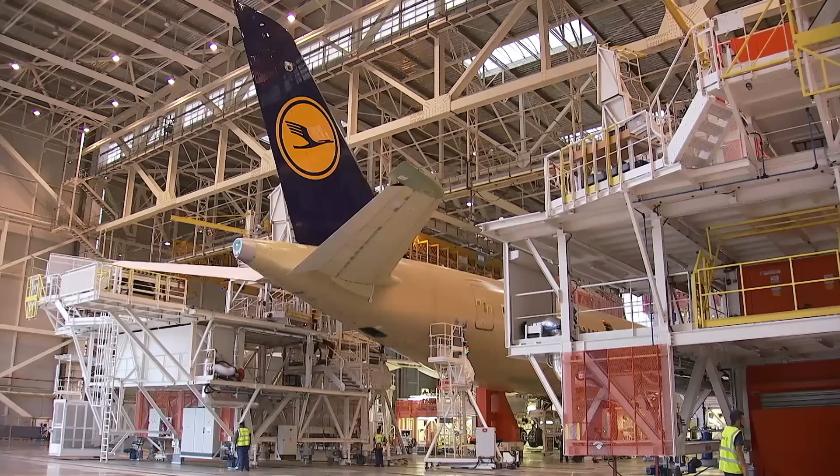Air travel has become an integral part of our everyday lives, connecting the people on our planet. For some years now, competition among airlines has been increasing, competition in which modern super airliners play an important role. The Airbus A350 is one such super airliner. Germany's largest airline has already ordered a significant number of these new long-haul aircraft. But can the airliner meet the high expectations?

The A350's first official flight goes from Munich to Hong Kong. The high-tech jet now has to prove itself under real conditions, a direct flight and a stress test with a duration of 12 hours. It's the most modern commercial airliner on the market.

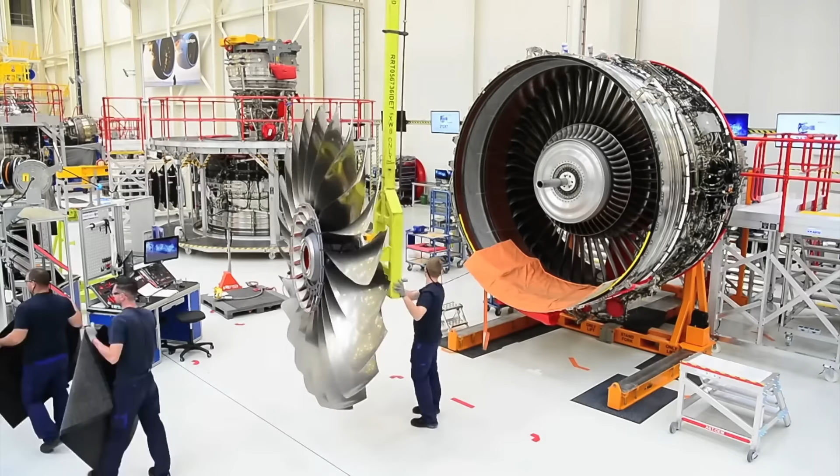The engines from Rolls-Royce have been completely redeveloped and enable the aircraft to carry out extreme flight maneuvers. We'll be pushing the aircraft to its limits here. On a test flight, the new A350 is rolled to a bank angle of 67 degrees.

There are also improvements for the passengers. More space and larger HD monitors are just some of the features. But the current super airliner from Boeing also has a lot to offer: new, larger windows and a completely new lighting concept for passengers on the 787 Dreamliner.

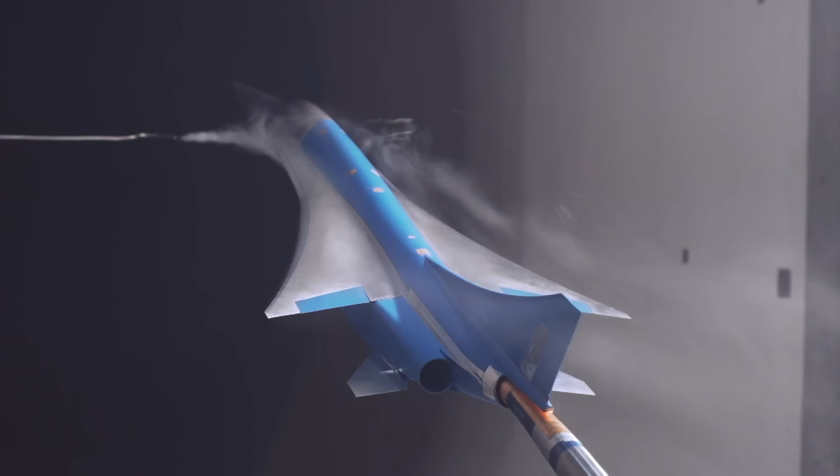London to New York in only 3 hours, possible only by flying at twice the speed of sound. But that's only the beginning. In the near future, even flying drones will help alleviate the traffic chaos in our cities. And developers are looking even further into the future with their concept plane, an example of what the future could look like. This future, we will build it together.

The super airliners for the new millennium are ready to hit the skies.

The Airbus factory in Hamburg. The city on the River Elbe is the third largest construction location for civil aircraft in the world. Around 12,000 people work here in development, design, and final assembly. Besides other aircraft, 2 super airliners are being produced on the 19 square kilometer site: the biggest passenger aircraft in the world, the A380, and the new long-haul jet, the A350. There was even a new assembly hall built especially for their manufacture.

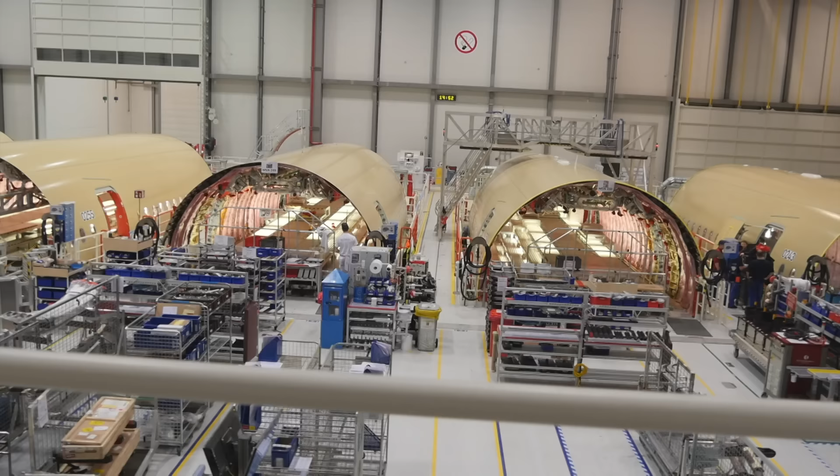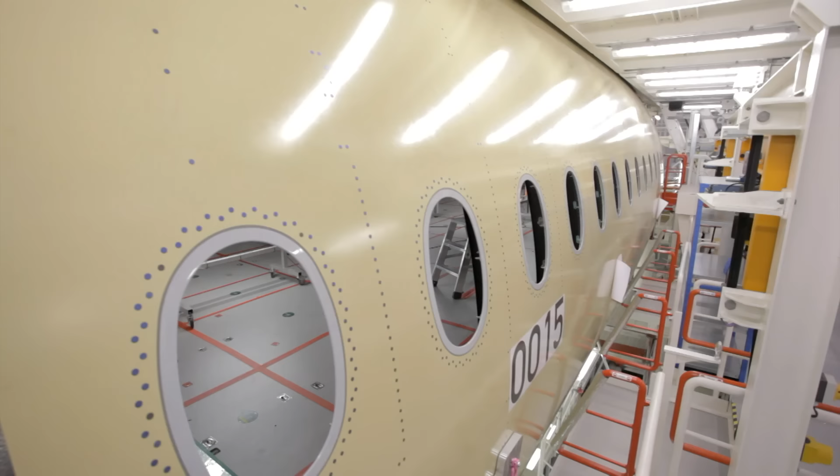Here, the mechanical and electrical systems are installed for 2 fuselage sections: the forward section, which starts behind the cockpit, and the rear section behind the wings. At first sight, the individual fuselage sections all look the same, distinguished only by their different production numbers. Everything runs according to a fixed assembly schedule, which begins with delivery of the front fuselage section. The staff here refer to this as the barrel, in which they gradually install the various systems. That is now much faster than in the old assembly hall thanks to the new construction method. For the fuselage and wing structures, more carbon fiber composites are used than in any other commercial airliner.

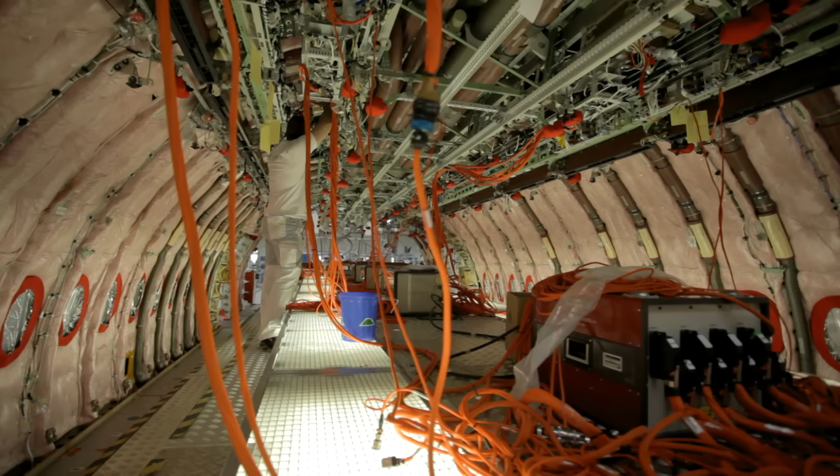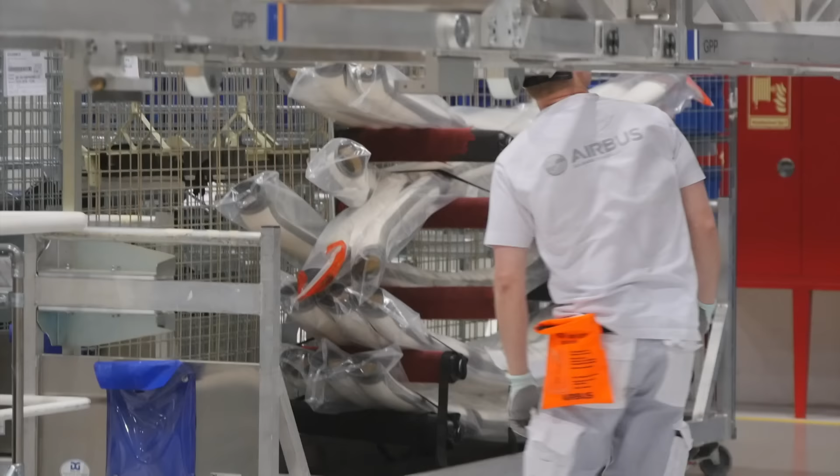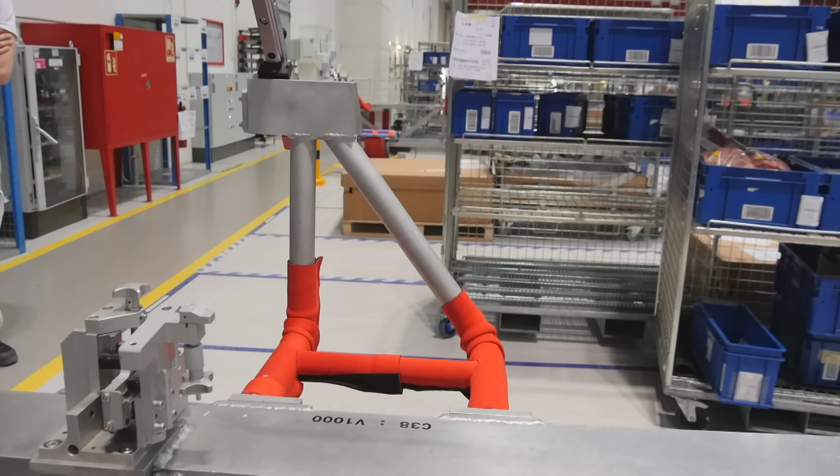After only 12 days, one fuselage section leaves the Hamburg works and is flown to Toulouse by the Beluga transporter. This production speed, however, is only possible by using the assembly method known as module integration. That's a very special assembly method here in aircraft construction. The A350 is currently the only program carrying out installation this way in the entire Airbus group.

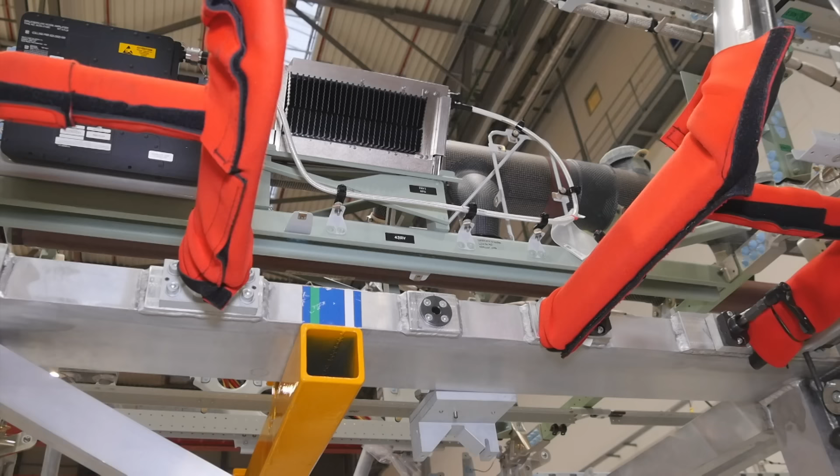In these frames, cables are laid, air conditioning ducts mounted, and small control devices installed. The benefit is that there's no more overhead work, as the modules are only installed in the cabin ceiling at a later stage, a great relief for the technicians. However, everything is still installed by hand. The cables are bundled into so-called raceways and then ducted before these raceways are also installed into the modules. Each individual line is then checked once again by technicians before being installed in the barrel.

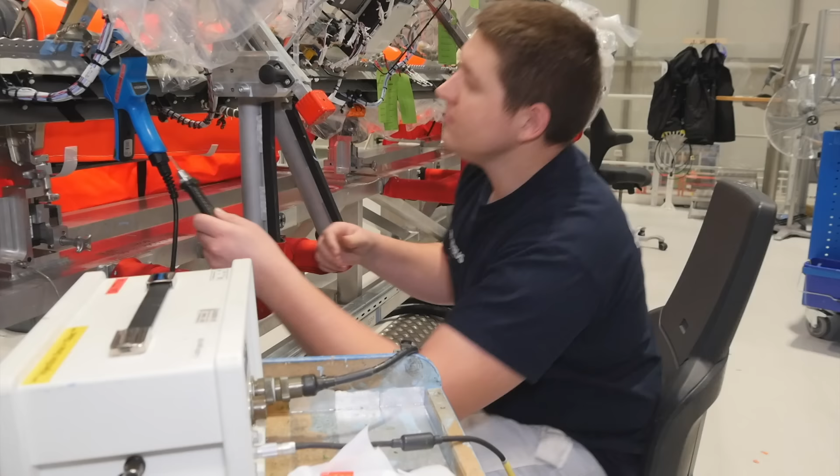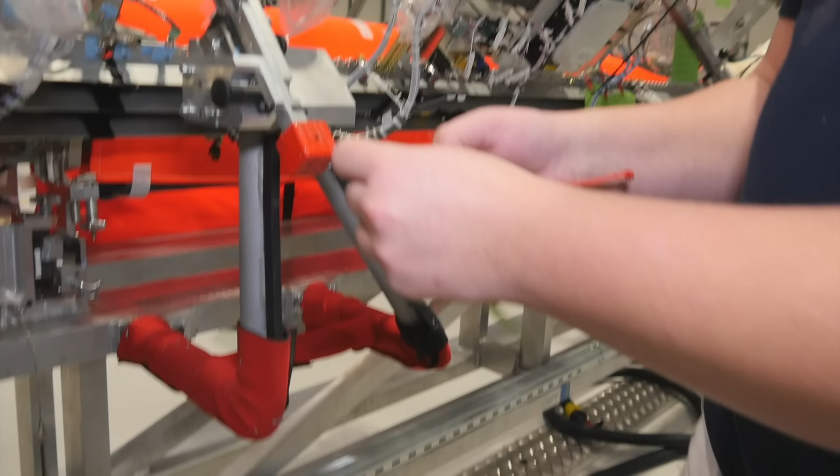If everything is okay, green labels are attached with the letters GTI printed on them. GTI stands for Ground Test Instruction, and there's a precise definition for the way we have to check our contact resistances and the rest of the electrical equipment. Electrical resistance is measured at various points with the help of a measuring device. This resistance measurement is extremely important for safety during flight operations. If the contact resistance or general resistance is too high, or the currents flowing over them get too high, as in a lightning strike, it would lead to a lot of heat developing here, and that's definitely not something we would want in an aircraft.

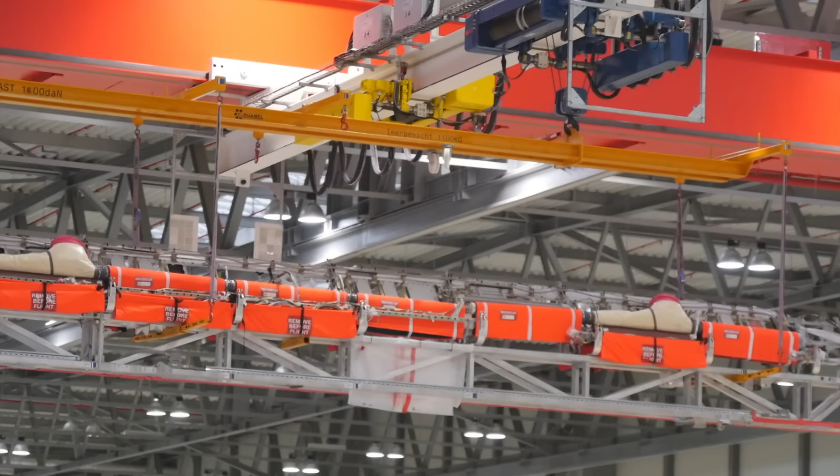Once the module has been assembled, it's carefully transported by crane to the A350 fuselage. The time saved by this new assembly method is enormous. The manufacturer now delivers more aircraft than ever before. A350 production alone now sees 10 aircraft completed every month. This is also due to the passenger cabin being assembled parallel to the fuselage, wings, and tailplane.

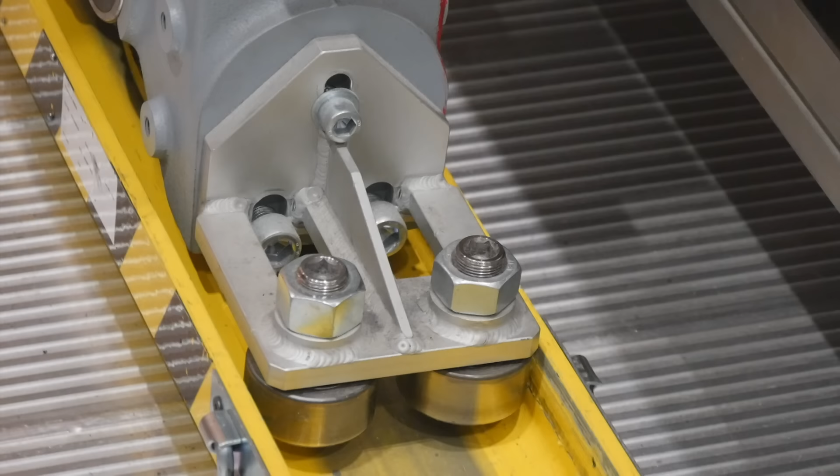Now the retaining bolts are removed and the module is slowly edged towards the fuselage. There are currently 3 versions of the aircraft available. Here, the middle version, the A350 XWB-900, is being built for Lufthansa.

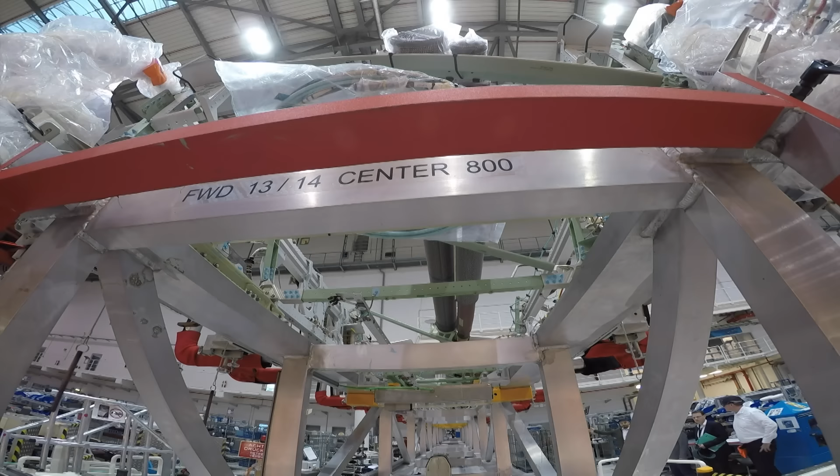The module is slid into the fuselage on a rail. Nothing must go wrong now. The slightest error could bring the entire production to a standstill. The technicians are all highly focused because the safety of future passengers depends on this.

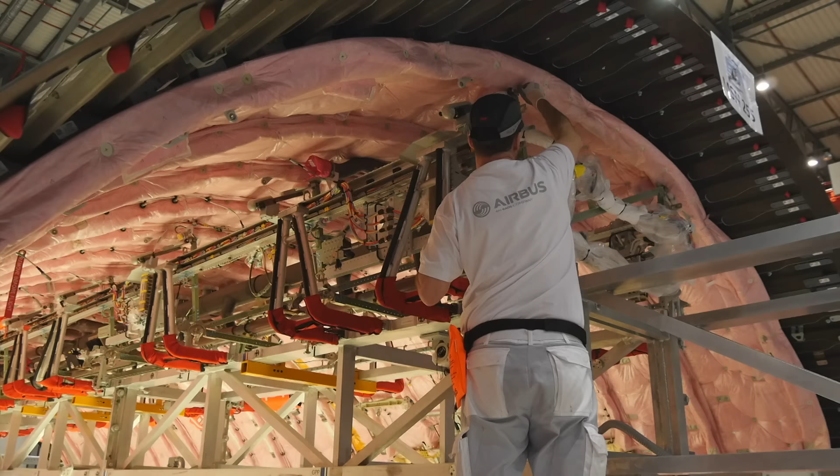Minor deviations in the height of the module are corrected using adjusting screws. Hundreds of cable harnesses are still hanging down from the module ceiling. They will soon all be laid individually by hand.

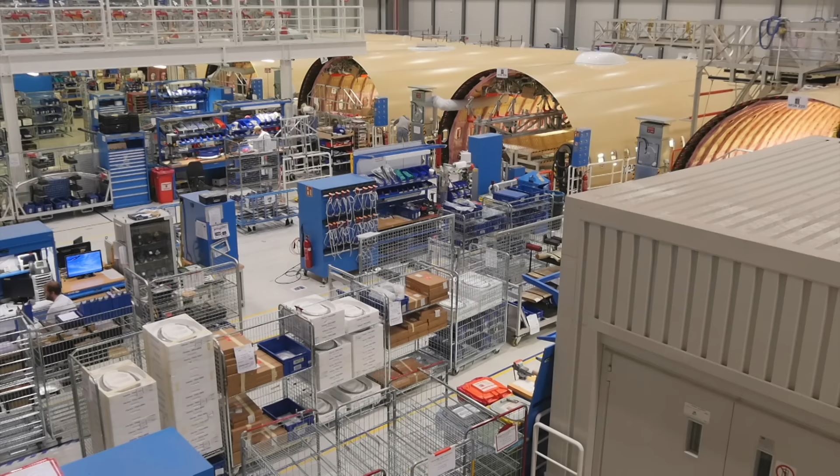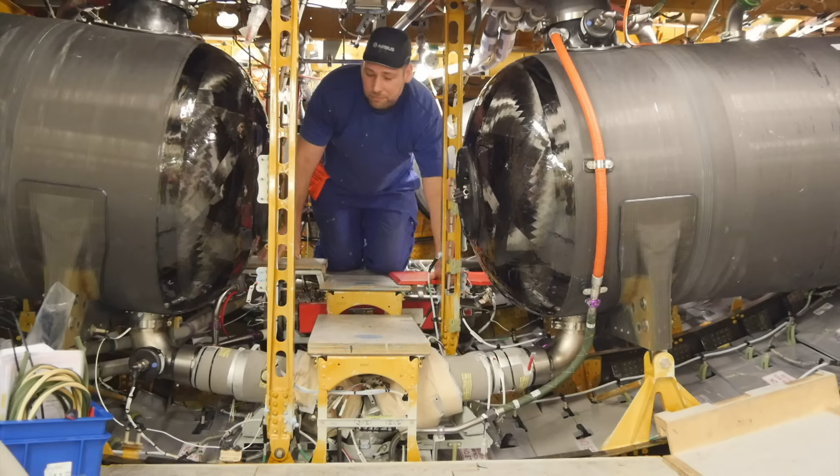While work goes on in the upper section of the cabin, in the lower section everything is finished. We're here in the plane's cargo section, where all kinds of systems are installed that passengers don't get to see. In the rear section, there are the fresh and wastewater tanks.

There are 2 freshwater tanks installed here, a larger and a smaller one. The larger tank holds about 800 liters and the smaller one around 600 liters. We allow about 40 liters per passenger.

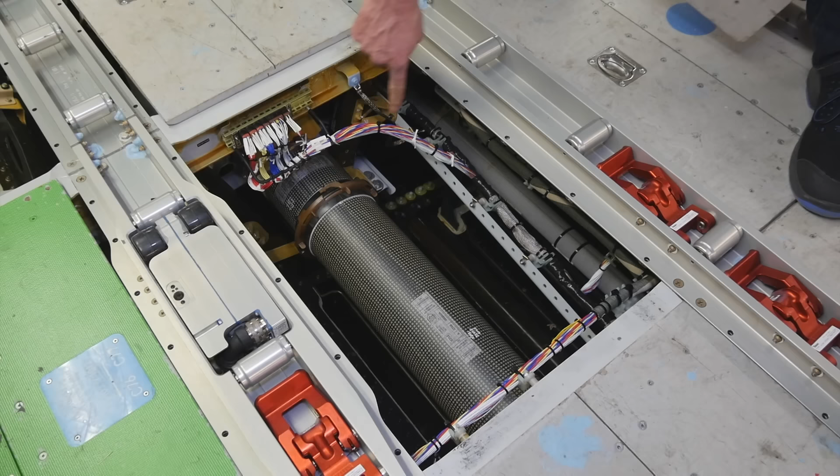Under this floor paneling is where the A350's oxygen supply is installed. The supply lines are well protected in the middle of the fuselage. Here too is all the cabling for the cargo system. This automatically guides the freight containers into the fuselage and ensures the load is correctly positioned.

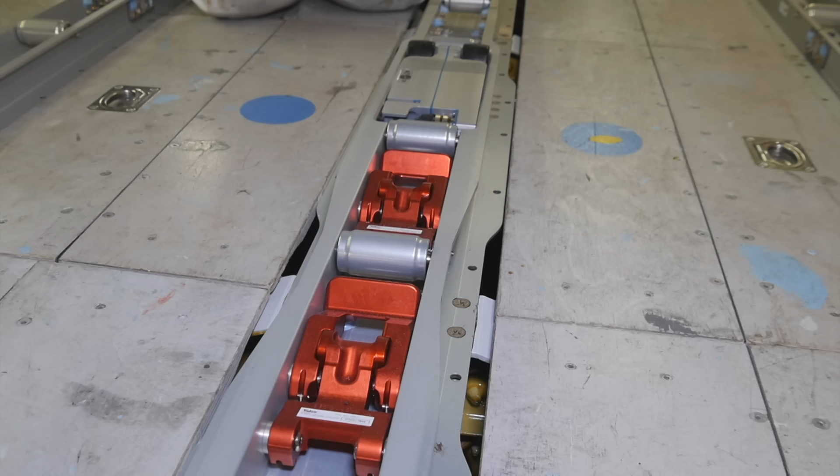Here we've installed the cargo loading system. These are the roller conveyors. They consist of different compartments where the luggage or freight can be loaded onto, and so it arrives at its destination safely without slipping.

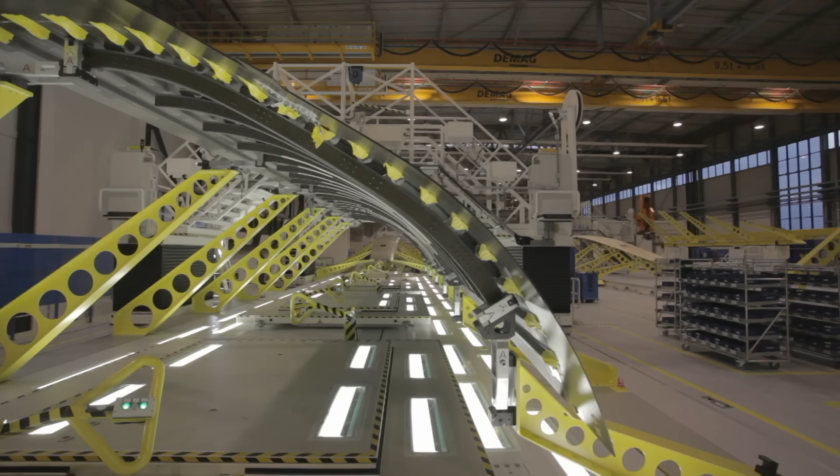After 15 years of development, the A350 will now succeed the Airbus A340 as the new super airliner. The way it's produced is also completely new. New materials demand new manufacturing methods. Special bolts are used to connect the fuselage sections.

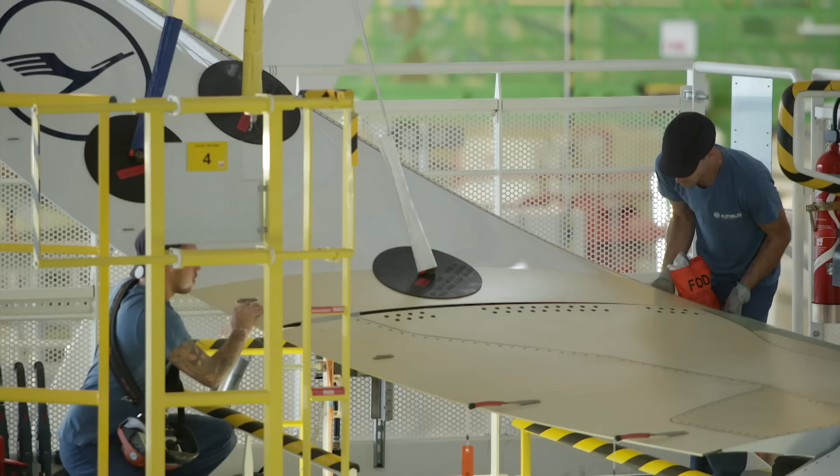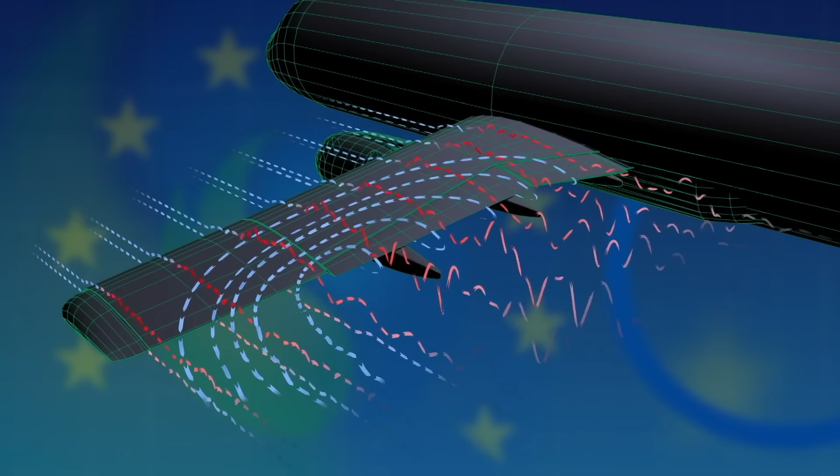The A350 also has reinforced high-speed wings. They are made of CFRP, a carbon fiber reinforced plastic, making them suitable for higher speeds. The extremely smooth wing surface the CFRP creates results in less air turbulence, which in turn means reduced air resistance and consequently more lift. This guarantees greater stability and at the same time 4.5 tons less weight.

To build these wings, a completely new process is used. Similar to the principle behind a standard 3D printer, the wings are built up layer by layer. Here, a small model of an aircraft wing is produced, but in the plant at Stade near Hamburg, the upper level of a full-sized wing is printed with the help of a giant roll of adhesive tape.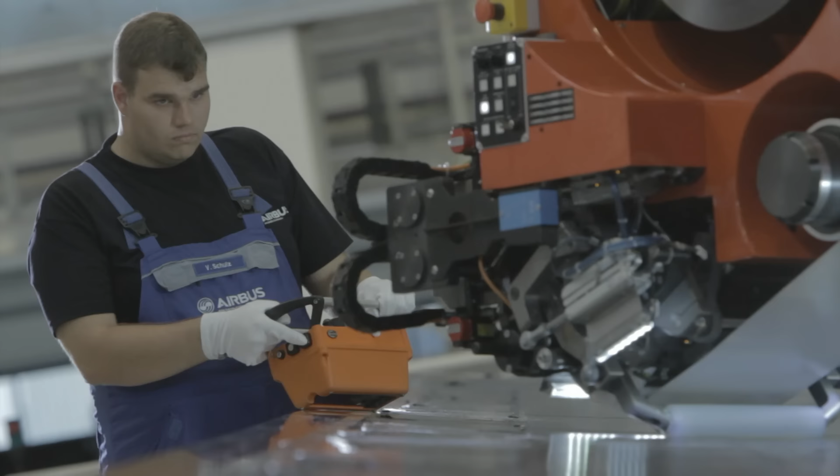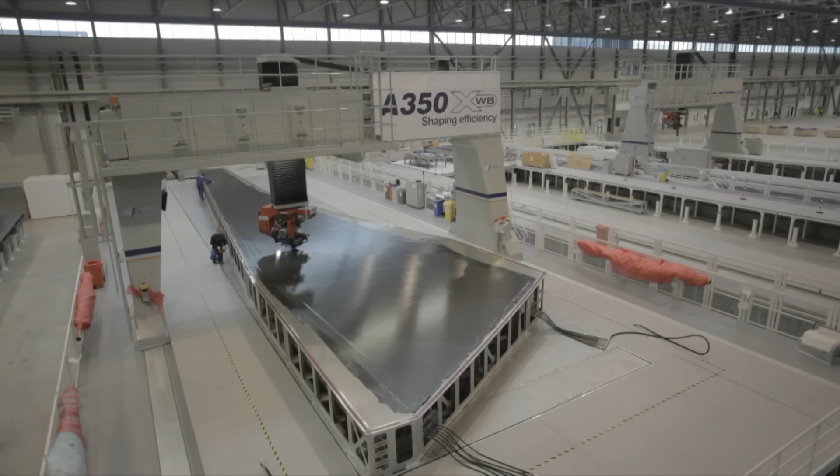On each of its long sides, there are 12 rotating spools which unroll black strips of CFRP. Large aircraft manufacturers are increasingly using this material to save weight, kerosene, and money. CFRP is stronger and easier to work with than aluminum or other metals. It's also much lighter.

In the development of the new super airliner, cooperation with the various airlines is extremely important. It's a continuous process. Based on our experience in daily scheduled operations and close contact with the manufacturers, Airbus, we help to develop new solutions for future aircraft, which can then later be found in our own fleet.

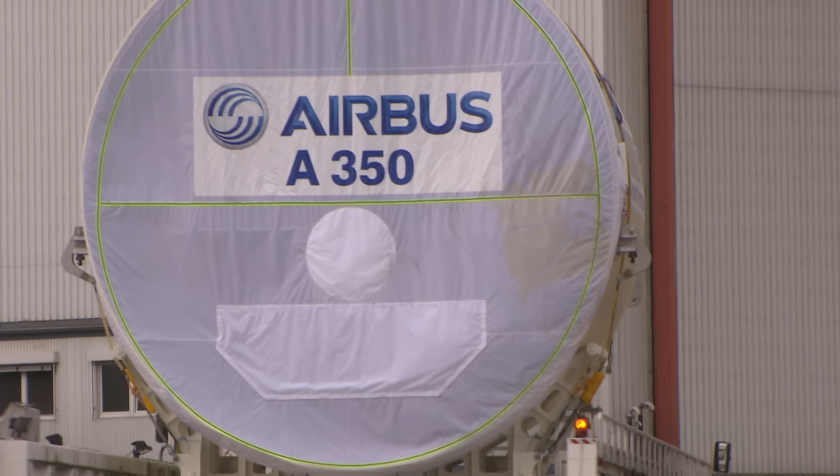All A350 parts manufactured in Hamburg are flown to Toulouse for final assembly. This is where the super transporter Beluga comes into its own. The Beluga is the aircraft manufacturer's backbone. It can carry up to 47 tons of freight, the equivalent of about 10 fully grown elephants.

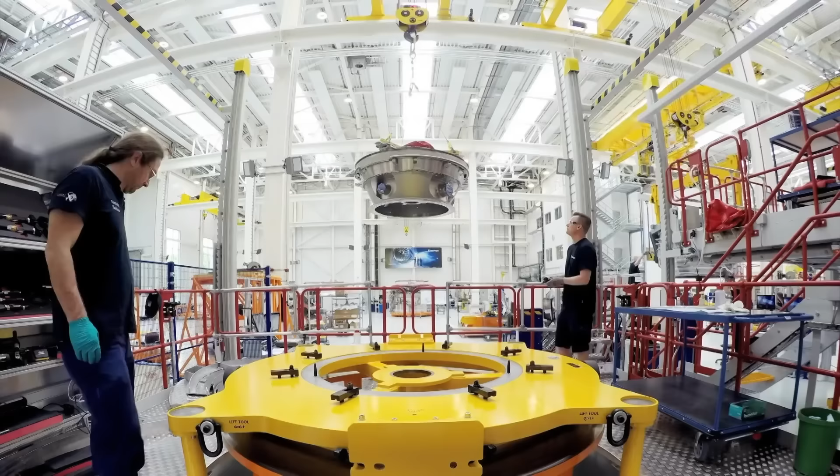Rolls-Royce MTOC in Dahlewitz-Brandenburg is the location for assembly of the new A350 jet engine, the Trent XWB. The airliner has 2 of them. Dahlewitz is the 3rd largest of Rolls-Royce's production sites. 2 XWB-type jet engines are built here every week. With a diameter of over 3 meters, they are among the largest and most modern jet engines in the world.

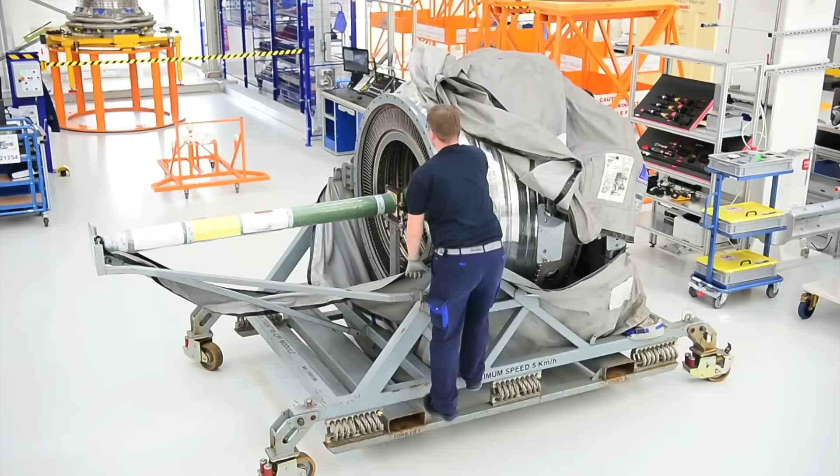Here too, most of the work is carried out by hand. Around 70 highly qualified engineers and technicians work here, putting together thousands of individual pieces like a huge 3D puzzle.

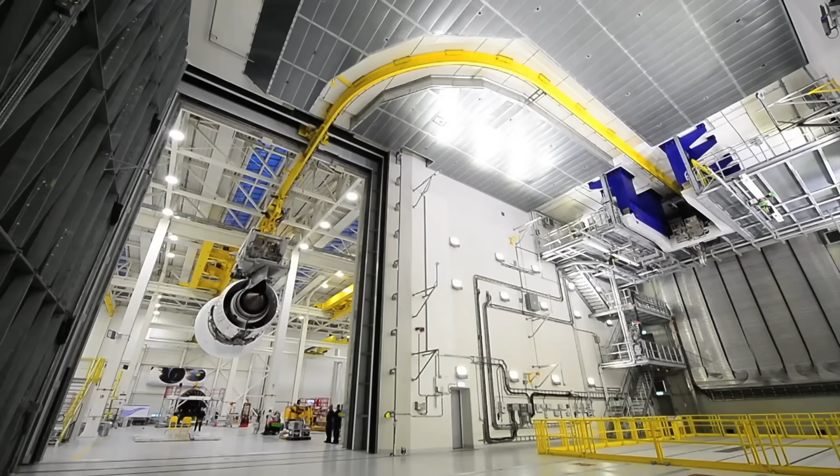After final assembly, the engine is tested thoroughly. Up to 40 different tests can be carried out in this 7,000 square meter facility. Only when all of them have been completed successfully is the engine transported to the Airbus factory in Toulouse.

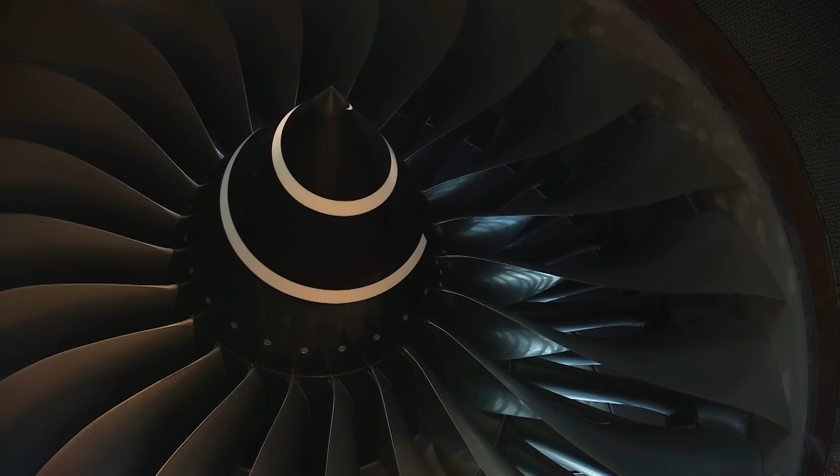Toulouse in southern France. This is the aircraft manufacturer's largest production location. It even has its own airport. The engines delivered by Rolls-Royce MTOC are now mounted onto the A350.

A short time later, the new aircraft stands completed on the apron. She's been given the name Bonn. The technicians have just installed the improved sharklets. Their special shape causes less turbulence and so reduces air resistance. The air flows more evenly past the wingtips, which increases the plane's range and reduces its fuel consumption.

Calculated in terms of consumption per passenger over 100 kilometers, the new A350 uses just under 2.5 liters, which at the same time enormously reduces its CO2 emissions.

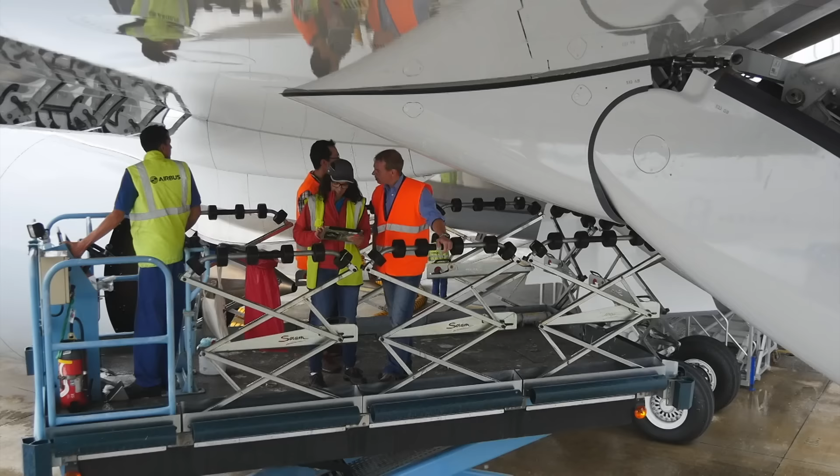In Toulouse, in the pouring rain, the final checks for the new airliner are underway. Everything is inspected and documented meticulously. As the machine is being delivered to the airline today, its own technicians are examining it particularly closely.

I'm in charge of quality check for the A350 here at the final assembly line and for deliveries. You've just seen me up on the fin where I checked sealants and paintwork to see if anything's flaked off here and there.

Minor problems are marked with green adhesive tape. At a price of €265 million, nothing is left to chance. To assess the paintwork better, it first has to be wiped dry. A slight scratch is visible on the back of the rudder. Nothing serious, it's marked and will be polished out later.

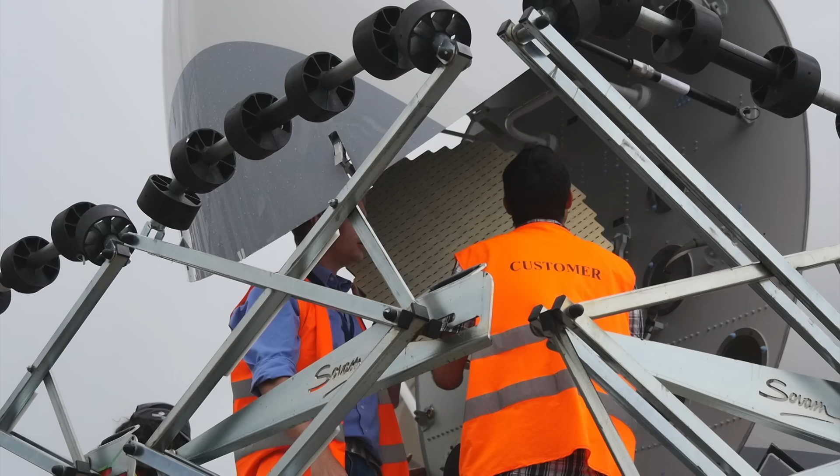Meanwhile, in the nose cone, the plane's radar system is being checked. It is located in the cone directly in front of the cockpit and is essential for information on weather conditions and airspace control. The inspection is completed and the test crew are very satisfied.

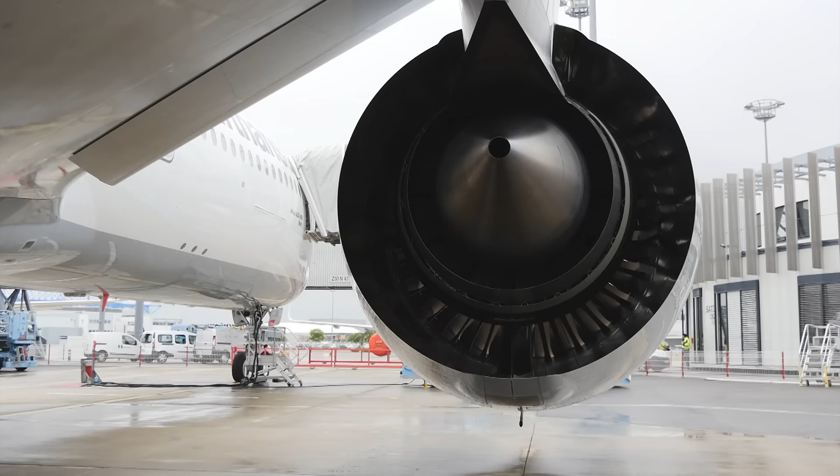The aircraft is now ready for takeoff. At the briefing, the planned test flight is now discussed down to the most minuscule detail.

I'd suggest, first of all, that we do a pull-up, plus 0.5 G. Yeah, I got that. This particular maneuver briefly creates weightlessness inside the craft.

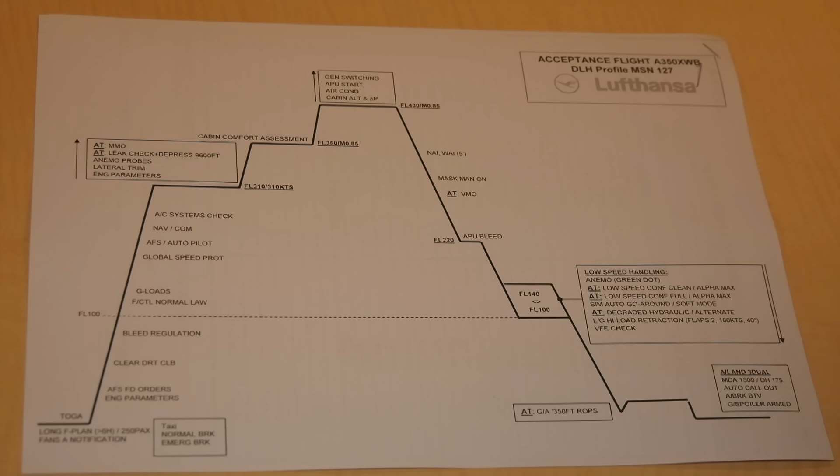This test flight is all about flying to the aircraft's limits, checking the so-called protections, the safety systems. An aviation engineer is also on board. My role on board is the flight test engineer and the test conductor, guiding the different sequence. An important task for the test flight ahead.

The pilots are ready and start preparing the A350 for takeoff. This test flight is also the acceptance flight. Only if everything goes smoothly and no major malfunctions or problems occur will Lufthansa take the aircraft.

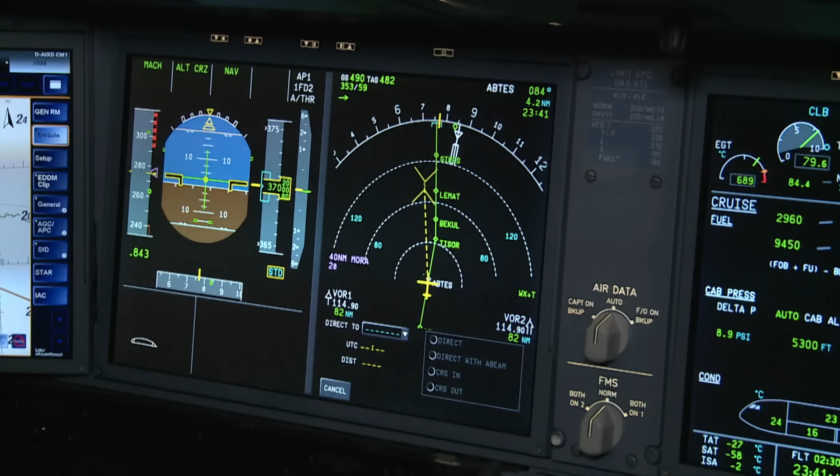The cockpit design has changed slightly and is now a two-person glass cockpit. A new feature is the mushroom-shaped mouse control handrests, which are also used in the A380. The display is made up of 6 38-centimeter LCD monitors. The content can be selected freely by the pilot.

The aircraft slowly moves off. Everything looks good, and the pilot gives the order for takeoff.

While the landing gear is still being retracted, the first readings come through. Engine performance, speed, and cabin pressure are all within normal parameters. The new Rolls-Royce engines and optimized aerodynamics reduce the aircraft's noise footprint by 30%, putting it well below the legal limits.

The first test is a tough one. The aircraft flies horizontally at maximum speed, around 900 kilometers an hour, and then goes into a climb. After only a few seconds, it reaches the apex of its trajectory. The engines are now throttled back so that the thrust only compensates for the air resistance. The nose of the plane now points towards the ground again.

In this phase, a clear reduction in gravity can be experienced in the cabin, almost like in freefall. Towards the end, the pilot pulls out of the dive by raising the elevator and ramping up the engines again. Test successfully passed. Now it's on to the next challenge.

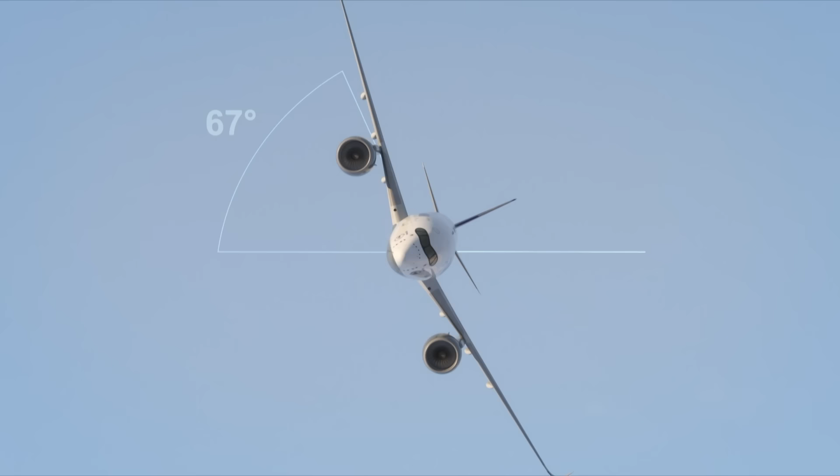There's always a great feeling when you see the plane flying at its limits. Martin flew it really well again, along with Wolfgang Abtsmeier. It's quite frightening when you're at an angle of 67 degrees and you can see France flying by down below. That's what makes for really excellent flying with this aircraft.

Competitors Boeing are also relying on high-tech and have built their own new super airliner, the 787 Dreamliner, which also boasts lower fuel consumption thanks to modern materials. These advances increase efficiency, simplify the operation of the aircraft, and provide noticeable improvements to the passenger's experience.

One of these innovations is the 787's new larger windows. Most people are going to say, I really like the windows, and they will, and that'll be true. But there's going to be a lot more going on besides the windows that you can't even see that we did on this airplane, and you're just going to feel better, and you're not going to know why.

At Boeing, too, all aircraft are thoroughly checked and examined before they are delivered. The 787 has enhanced stall protection, which allows the pilot to be able to have the full lift capability of the airplane at

their command. And that underlies the overall Boeing philosophy of having the pilot in full command of the capability of the airplane.

Munich Airport. The crew of the new A350 Bonn is getting ready for their flight to Hong Kong. First, the cockpit crew has to order the fuel for the first flight.

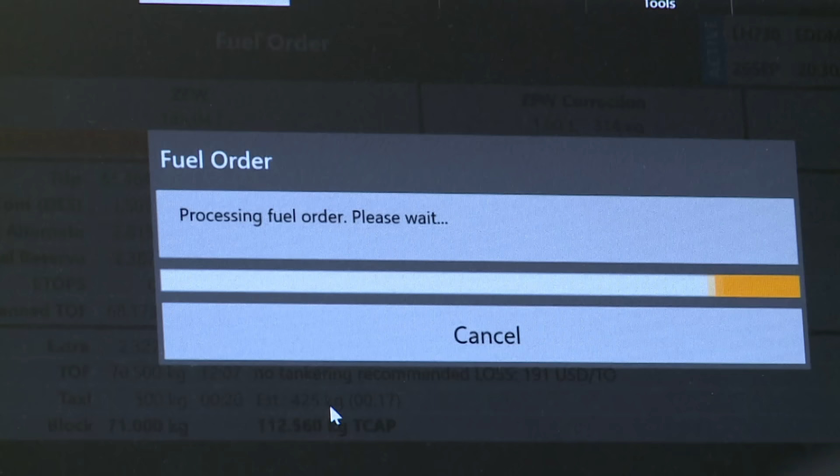So you've not flown the new route to Hong Kong yet either? Neither have I, but I was involved in the calculation. So I think we can order the fuel. Would you agree with 71 tons? Right. I'll enter that then.

Not long until takeoff. In a final meeting, the latest flight and passenger data are checked. The flight attendants are divided into teams, and the special features of the new aircraft are discussed once more. It flies faster than other aircraft and only takes 10 hours, 30 minutes from Munich to Hong Kong.

Then the crew make their way to the brand new plane. The A350 with the name Bonn has only just been delivered to the airline by the manufacturers. It has a completely new, wider fuselage, new high-speed wings, and newly developed engines. Fueling is already underway.

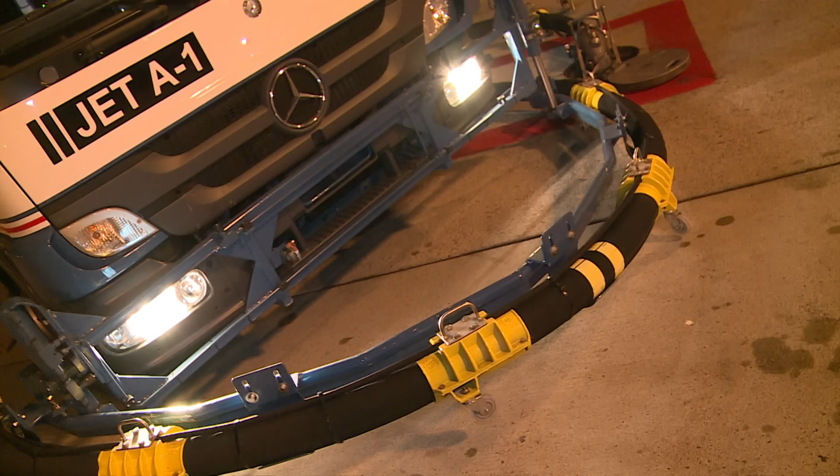Before takeoff, Captain Jasper carries out the so-called ground check, in which he personally inspects the exterior of the machine once more. Obviously, I can't see inside the system, but there are certain places you can look at to make sure they're in order, indicating the general condition of the aircraft.

The A350 Bonn is ready for takeoff. The pilots take up their positions in the cockpit. For safety reasons, there are always 3 pilots on long-haul flights who alternate regularly.

The final provisions are stowed away in the cabin. It's all brand new on this aircraft. You notice that as soon as you come on board, everything smells new. We're very proud that it's the staff based in Munich who are the first to fly on this plane.

And now the first passengers also come on board. The flight attendants have to deal with a completely new system. Though it's all been practiced in advance, things are often different in reality. Some things are not where they should be, but in general, everyone is satisfied.

It's definitely very pleasant, there's more space. Of course it's a change from the A340, because there are 2 galleys here now, at least in the new business class. The caterer has meanwhile delivered the food, and the cockpit crew is ready for takeoff. The passengers are on board, we're excited, the doors are closed, we're taxiing, and I'm really looking forward to our flight to Hong Kong.

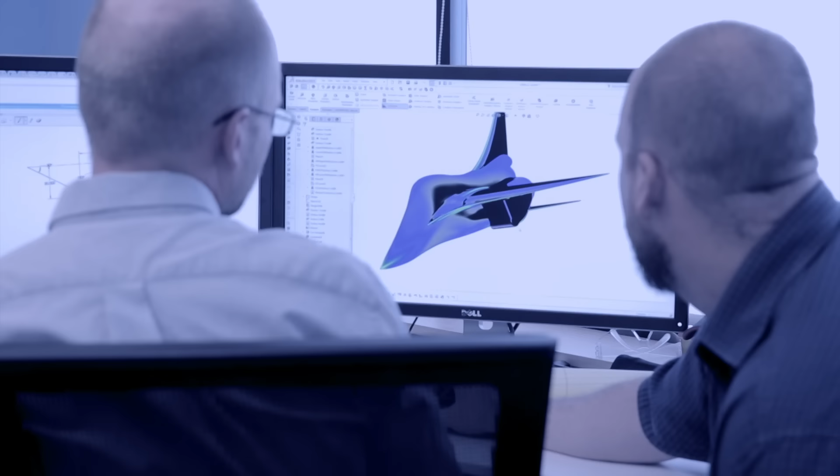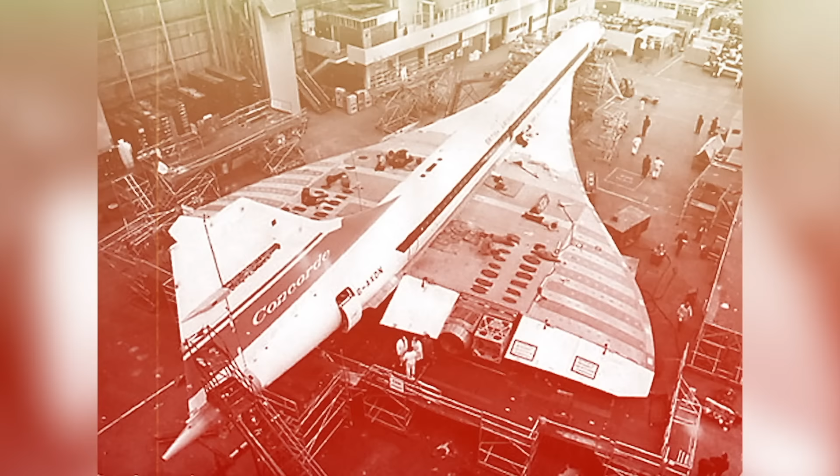To accomplish our goal of affordable supersonic travel, we challenged our engineering team to create a design at least 30% more efficient than Concorde. Concorde was the world's first supersonic passenger airliner. It went into service in 1976, covering the Paris to New York route in less than 3 hours.

After an Air France Concorde crashed in July 2000, the service was discontinued. For the first time since the Concorde, supersonic passenger flights could soon be in the skies again. The US company Boom believes new materials are the key to achieving this.

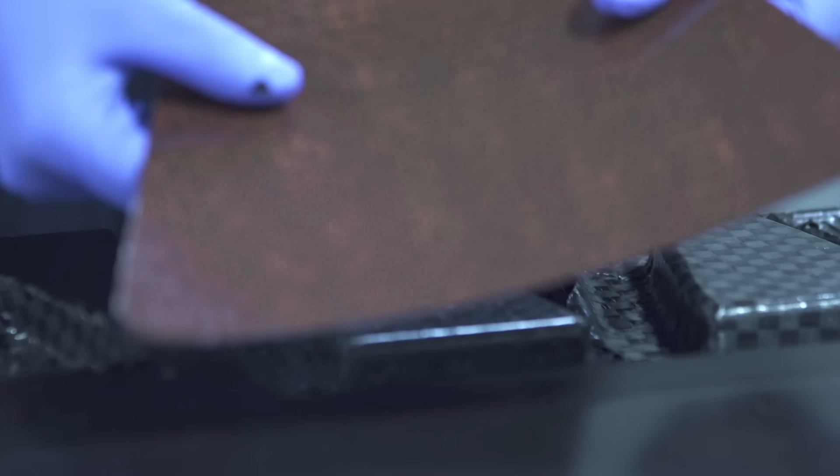Carbon fiber composites allow us to realize the aerodynamic design with a strong, lightweight structure. To create a carbon fiber part, we first start with a high-precision mold, either CNC machined or 3D printed. We then apply layer after layer of carbon fabric and resin to the mold. Finally, each part is cured in an oven or autoclave under vacuum at temperatures of up to 450 degrees Fahrenheit.

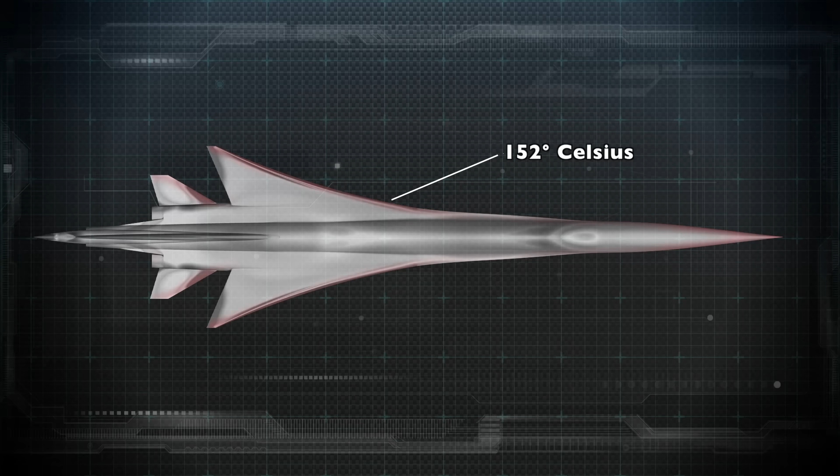Cruising at 1,451 miles per hour, the nose and leading edges of the aircraft can reach temperatures of up to 307 degrees Fahrenheit. These carbon parts outperform aluminum at the high temperatures of supersonic flight.

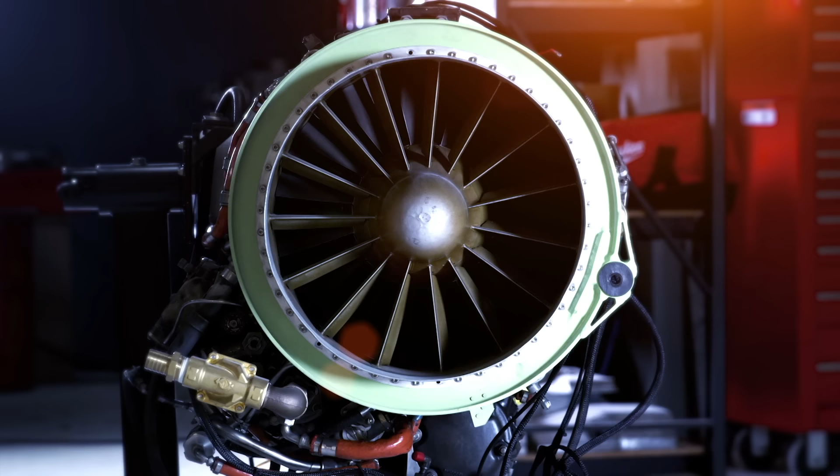The propulsion system is composed of a variable geometry intake system and an efficient turbofan jet engine. Our engine is based on the same technology that powers modern subsonic aircraft, but with a customized fan and a variable geometry exhaust. Lastly, we use 3 engines for added reliability and safety - 2 engines under the wing, and a third in the tail.

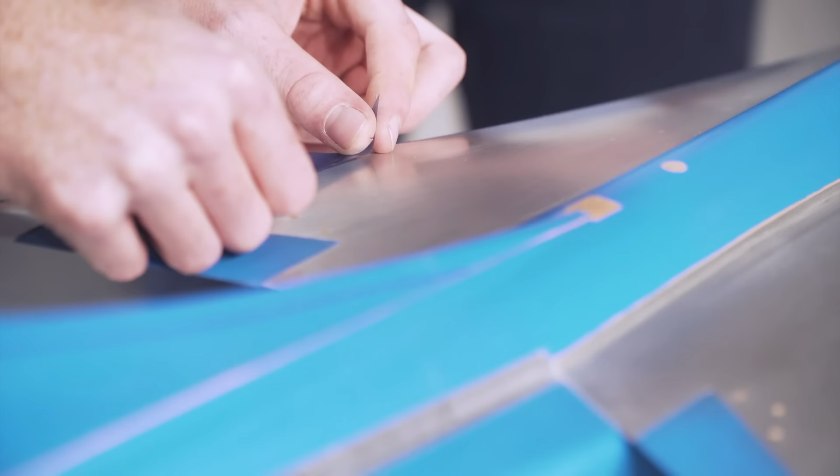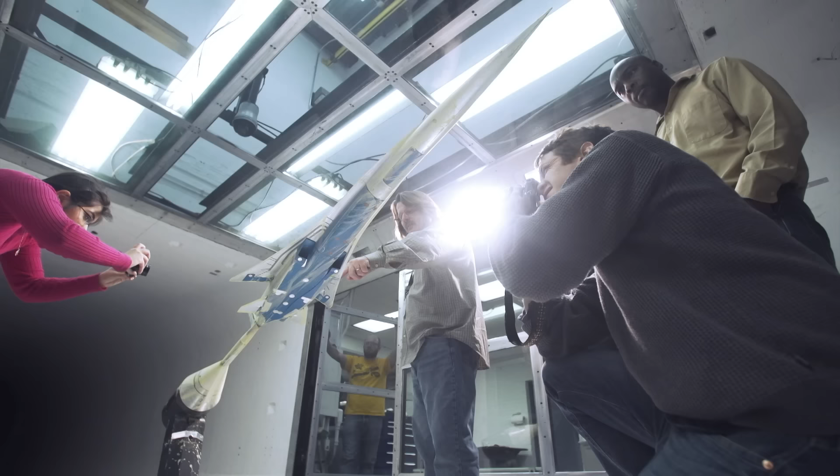Before actual construction of the new super airliner can begin, a lot of testing has to be carried out in the wind tunnel. A small model is built and covered with different materials. This is done to determine the behavior of different materials under strong wind resistance. If it is torn off or deformed, a better material has to be developed. Testing, however, is going very well.

With a flying time of only 3 hours from London to New York, the engineers decided against seats with recliner function, preferring instead modern communications technology ideal for business travelers.

On its maiden flight to Hong Kong, the A350 isn't quite as fast, flying through the night at 950 kilometers per hour. We're here in the larger central galley.

The A350 has a few new improvements which other airliners don't have. There's a refrigerator where passengers can help themselves. We have a few environmental innovations for disposing of leftover food and drinks. And we also have a self-service area to make sure our guests are always provided for. The air on board is also much better, a luxury that all classes benefit from.

This makes the cabin pressure feel lower, and as this is a long-haul aircraft, it contributes to making the journey in the A350 feel more relaxing. There have been a few changes to the seats, too. They are wider and more comfortable throughout the entire aircraft. Even in economy class, new standards of seating comfort now apply. The high-quality mounts and brackets here lead to significantly less vibration in the seats themselves.

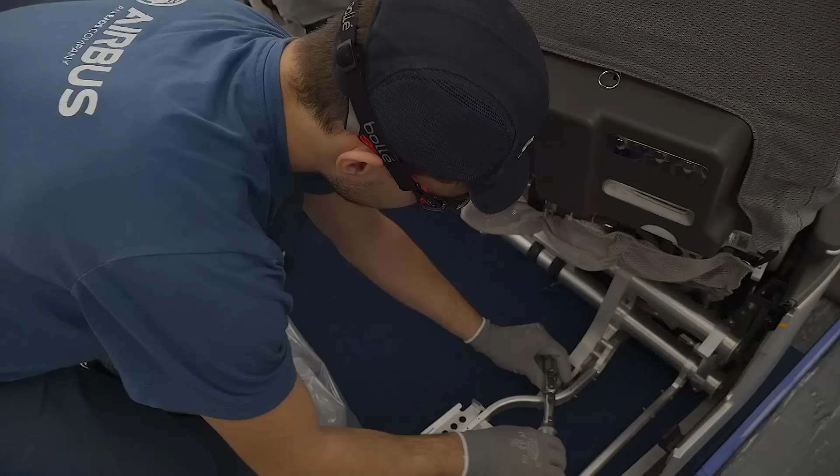We're in economy class today. This would have been business class only a few years ago. If you look at the seat, we have 18-inch wide seats, better than any other aircraft flying in the skies today. 17-inch seats have been standard in many aircraft up to now - that's a little more than 43 centimeters.

The 17-inch seat is the seat that prevents you from movement. It prevents you from getting comfortable during that flight. Our industry is changing, and the needs of passengers are changing as well. A study has shown that the sleep phase for people in 18-inch seats is much longer and more intensive than in 17-inch seats. As the research has shown, 1 inch makes all the difference.

Onboard comfort has also improved for the A350 crew. They now have a proper sleeping cabin for up to 6 people.

And this is the so-called purser bed for me and my purser colleagues, because it's closest to our interphone. And the purser is the one in charge of communication, who has to make the phone calls. And this way you can make your own little comfort zone.

Another super airliner is the Boeing 777. Like the A350, it's used by all the leading airlines. The cabin equipment is modular and can be converted as required. In the 777, wider seats and improved cabin air are important features.

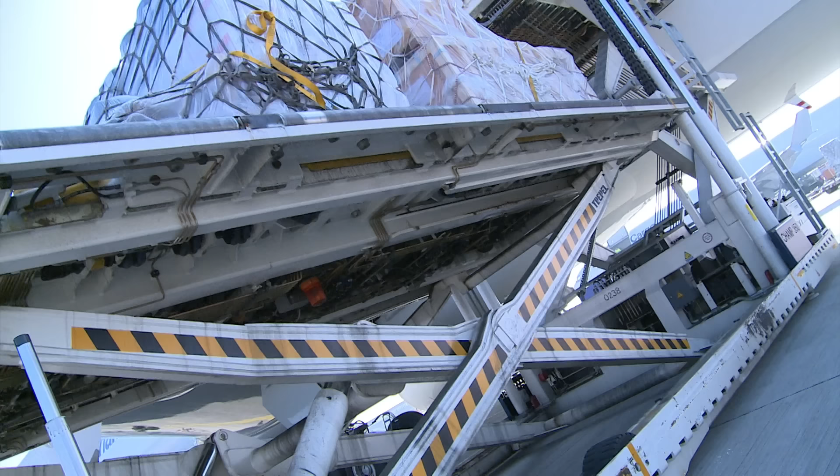The 777 has a revolutionary new loading system, with which freight containers are loaded onto the aircraft by a lifting platform in a specified order. Each container weighs as much as a small car.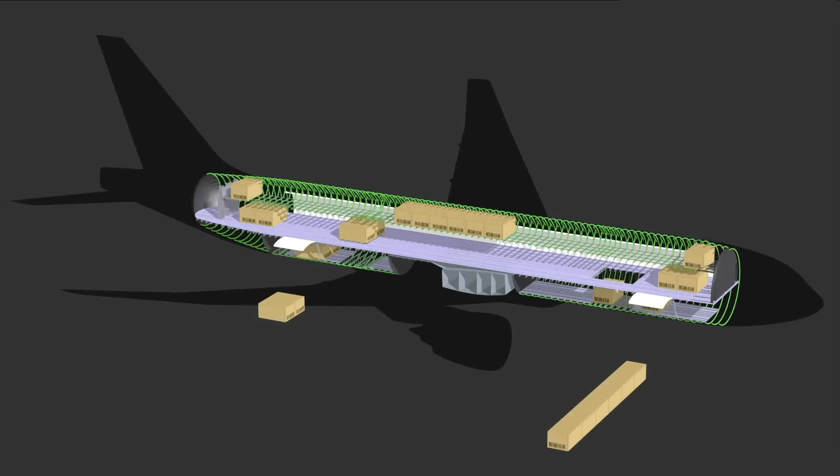The heavy containers are first transported to the upper deck of the hold by a sophisticated elevator system and then distributed evenly across its entire area. The procedure continues on the middle deck. Only at the end of the operation is the lower deck filled.

Behind the cockpit, there's a small kitchen through which the crew members can access the hold. Captain Frank Lumnitzer checks the cargo. There's not a lot of space left for him to get through. Anyone used to a passenger cabin will find this a little unusual.

We've loaded 98,700 kilos of freight. I don't know yet the specifics of the cargo - I'll get that afterwards from the handling agent. Ultimately, it's freight that's either valuable or that has to be delivered punctually from A to B.

In here, two Greyhounds are waiting for takeoff. The freight documents have now arrived and are all in order. So now to the external inspection of the 777.

A routine exercise for Captain Lumnitzer, who is flying the aircraft to Chicago today. Our technicians have prepared the aircraft, and it's now down to me as captain to get my own impression of the condition of the aircraft.

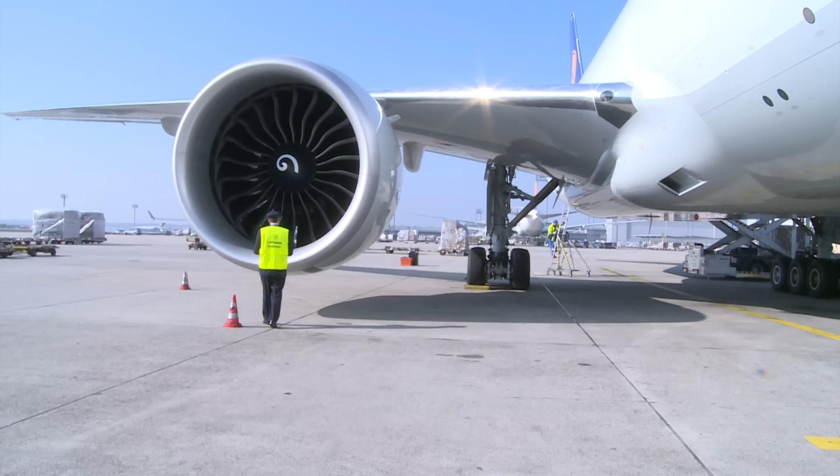Boeing 777s are equipped with the most powerful engines available in commercial aviation. They have a diameter of well over 3.5 meters and generate thrust of over 110,000 pounds. What makes this General Electric engine so outstanding is a special kind of air compression. Air is continuously compressed over a number of individual compressors, also known as fans, before it's mixed with kerosene.

This mixture is ignited and drives the turbine. The turbine exhaust then provides additional thrust and turns this engine into a super engine.

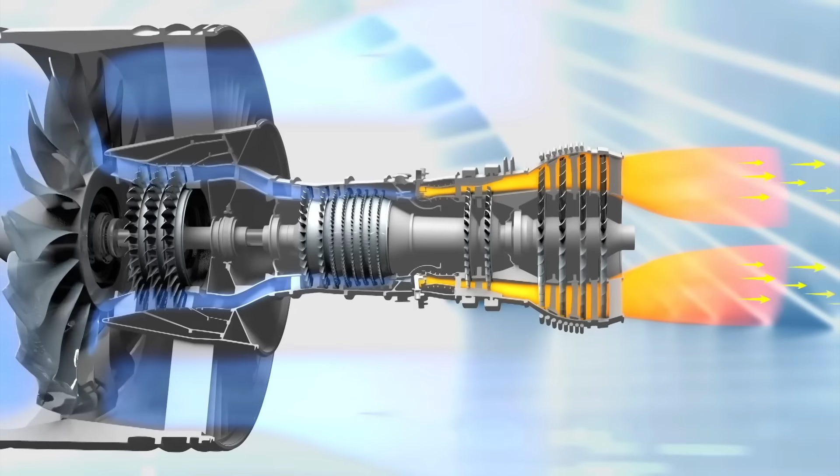The Boeing 777 is now ready for departure. So, it's time to go. We're off to Chicago, and we want to be punctual. With a range of 11,000 kilometers, the 777 operates a network of almost 300 destinations from Frankfurt.

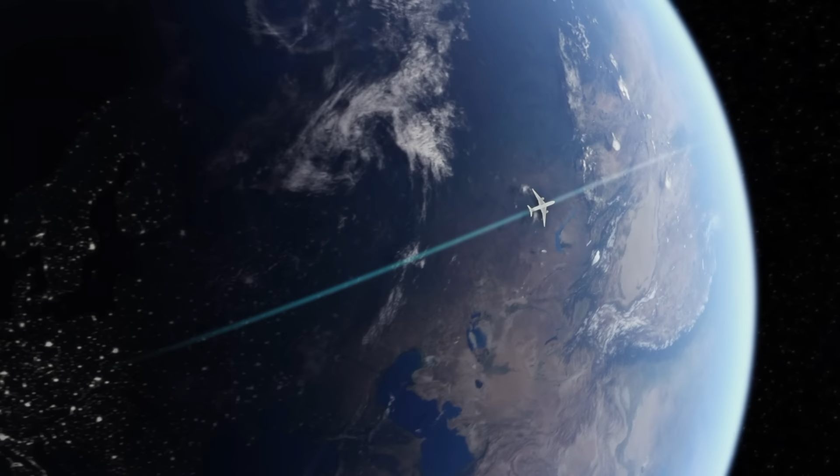Back on board the A350, Hong Kong is already drawing much closer. The plane is just crossing the foothills of the Himalayas.

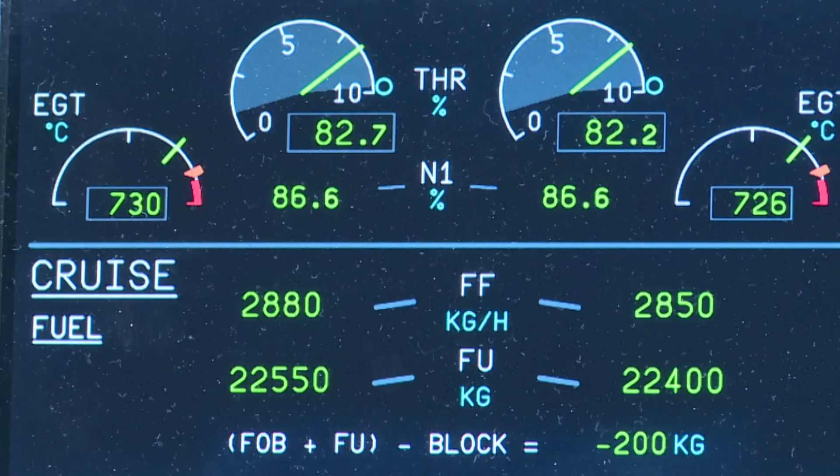Below us, the 6-kilometer-high Tibetan plateau, but the aircraft is running well, the systems are working excellently, and the fuel calculation we made in Munich seems to be working out. We'll have enough reserves when we get to Hong Kong. All the other parameters are also keeping the pilots in a good mood.

This is the most modern commercial aircraft currently on the market, and you can really see that too. When I compare it with all the other models I've flown so far, like the A340 or the A330, this is a completely new generation, with a cockpit very similar to the A380.

That's due, amongst other things, to the mouse control and freely assignable monitors. The automatic height control for both pilots is in the middle of the control unit. There's also a kind of tablet on each side of the cockpit on which the pilots can look at map material.

The aircraft now begins its descent. The map of Hong Kong Airport has been loaded to prepare for this.

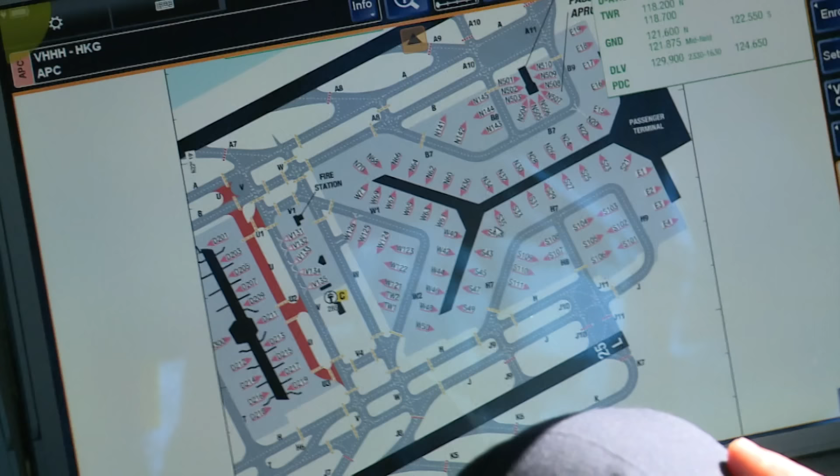As expected, the aircraft held up very well and flew reliably. We're now on our approach and will soon have completed 10.5 hours of flying. And of course, I'm looking forward to the landing and our stay in Hong Kong.

But unfortunately, the A350 has to take a slight diversion. The airspace over Hong Kong is so crowded that the aircraft has to circle amidst the clouds. Time for the pilot to switch to manual control. In the clouds, visibility is down to zero and the pilot has to rely blindly on his instruments.

Suddenly, the cloud cover breaks. That's central there, the center of Hong Kong. And on the other side, that's Kowloon.

Finally, the tower gives landing clearance. The airport lies on one of Hong Kong's many islands. In the cockpit, complete concentration.

70, 60, 50, 40, 30, 20, retard, retard, retard.

The A350 was my first flight to Hong Kong. It worked out quite well. We had to fly a bit of a zigzag - we don't know why exactly, but never mind. We're here now, a bit late because we had to wait in Munich, but it all worked well.

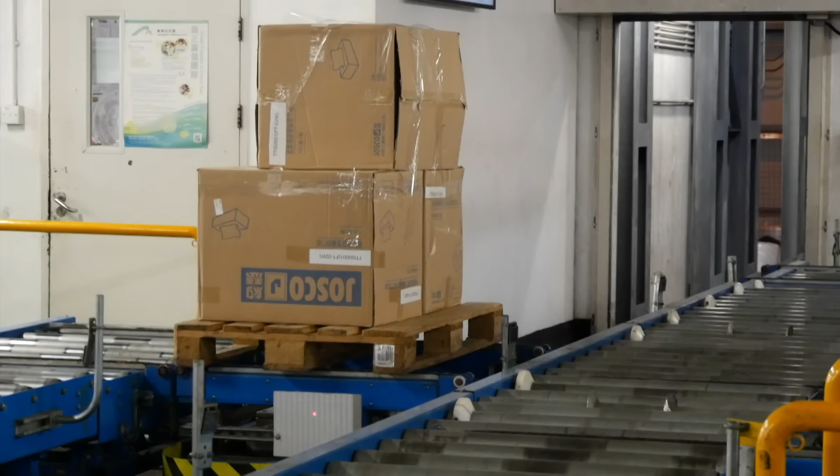Right near the airport is the base of LSG Sky Chefs. The catering business is a Lufthansa subsidiary and the second largest supplier of onboard catering services, with a worldwide market share of 20%. In 2017, the 35,000 employees produced around 696 million meals, achieving a turnover of 3.2 billion euros.

The LSG Hong Kong warehouse has absolutely everything. Here, the catering for the return flight of the A350 Bonn is being prepared. The trolleys are still empty and have to be filled up with glasses, drinks, and snacks. We follow the packing list from Lufthansa, using the part number indicated, and we pack according to all the items listed and also the quantity.

Every day, cutlery for over 10,000 passengers has to be cleaned and packaged, all by hand.

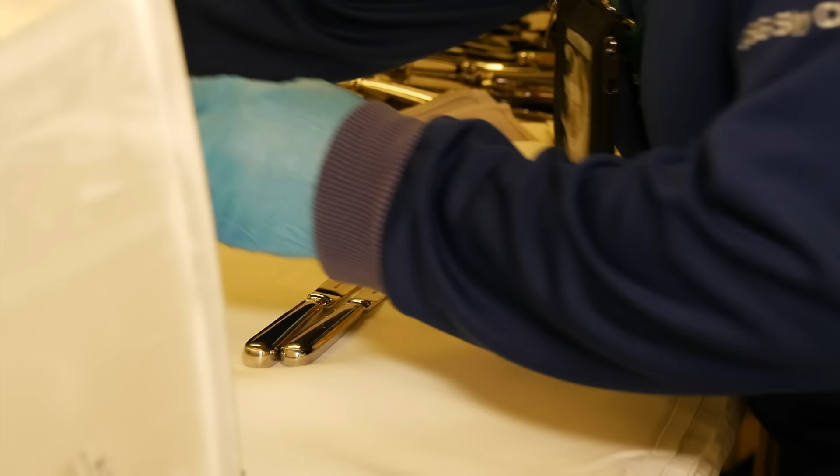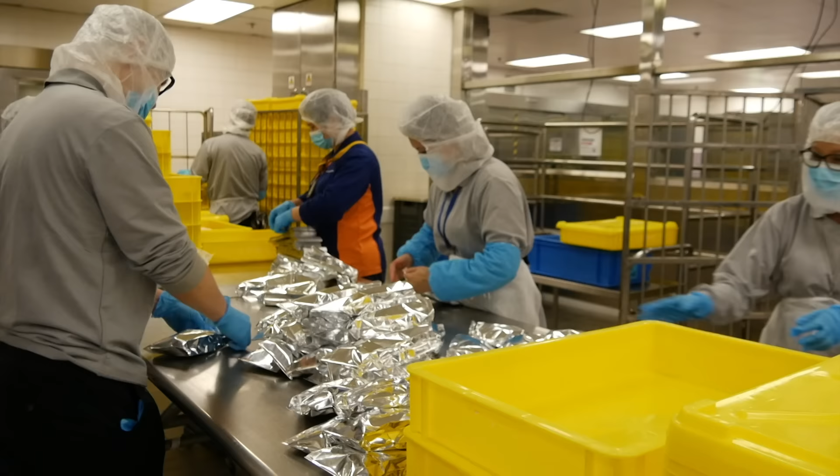Cooking for extreme conditions. At an altitude of 10,000 meters, the sense of taste is altered by low pressure and low humidity, and the effect of spices is weaker. The chefs know exactly which strong flavored dishes bring the taste buds back to life. Rolls and side dishes are freshly made and then individually packaged, more than 10,000 every day. The sauces are also a little thicker, so they won't be thrown off the plate during turbulence.

It's more challenging every day to be an executive chef here than at a hotel, because you need to satisfy so many different customers every single day. The chef is always there, keeping a watchful eye on the preparation of his creations.

I can't cook everything alone for the airline, so I have a team. But I need to make sure to bring what I want, my vision of the food, so the team can produce exactly the same.

All the food for the return flight of the Bonn to Munich is prepared by 3 chefs at the same time, and this is just for the business class passengers.

The only way to prove yourself and to make your staff trust you is to cook, to show them your value, and to show them that when you say something, you know what you're talking about.

It's very important that no dish is higher than 4.5 centimeters, otherwise it will touch the next tray in the tightly packed trolley. So here, even star chefs like Michel Boussemont have to observe the limits dictated by dimensions.

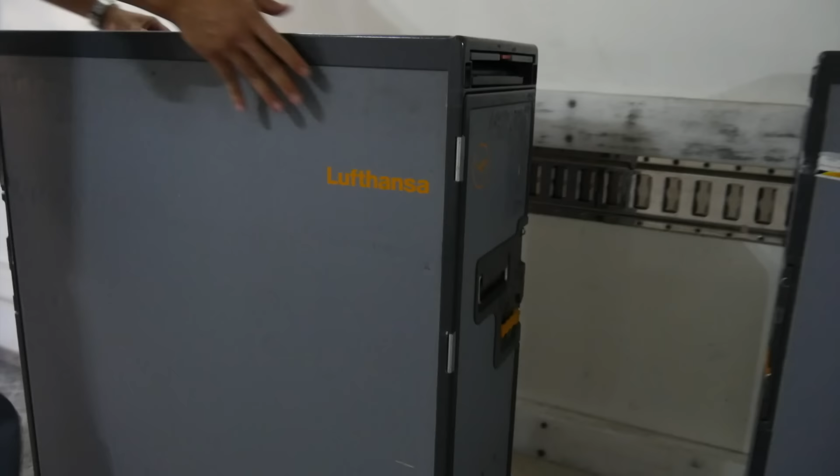Safely packed onto the trolley, the Bonn's onboard refreshments begin their journey to the airport. There's still time - the Lufthansa A350 doesn't leave Hong Kong for another 90 minutes, so loading can be carried out as scheduled. One trolley after another is loaded onto the refrigerated truck. Now they drive to the airport.

The LSG refrigerator trucks dock onto the A350 and the food is unloaded. Meanwhile, the crew is back on board the Bonn and is preparing for the return flight. In only a few minutes, everything is finished and the aircraft sets off for the runway. After her successful maiden flight, the A350 will from now on fly back and forth from Munich to Hong Kong on a regular basis.

Demand for modern airliners is growing. China, in particular, is ordering various aircraft models in increasing numbers. In fact, the People's Republic has only recently taken delivery of its 50th A330. This development has prompted manufacturers to further optimize production.

First of all, we continue the ramp-up of the A320 to be ready to deliver on our commitments in 2019, which is 60 aircraft a month.

Another very important subject is the future of mobility. Aircraft manufacturers want to test new concepts for improving short-distance travel. We now start to take care of the full mobility experience as long as flying is involved. So we look at things from door to door, including ground transport, security, operations at the airports, doing the flight, but making it an experience for the passenger.

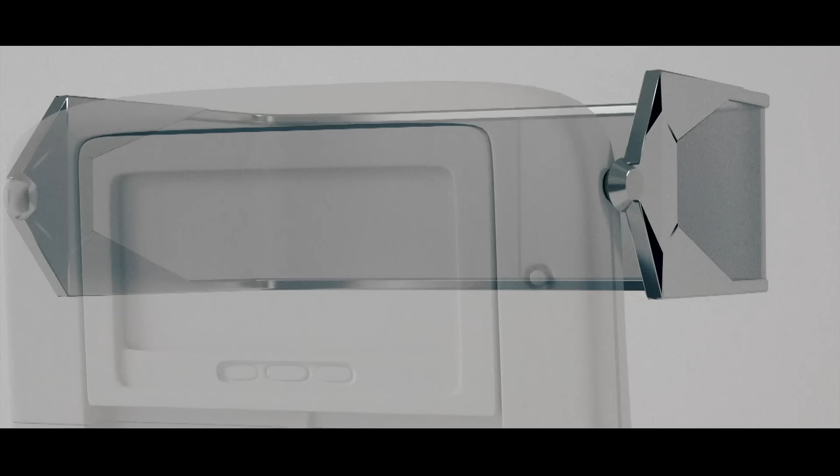On display in the so-called cocoon, the flight attendants can read any special wishes a passenger may have. When lowered, the cocoon greatly enhances passenger privacy. At the same time, its display makes the onboard entertainment system a very different experience. During takeoff and landing, the seat automatically reports whether all passengers have their seatbelts on or not. The seat's colored light signals also make boarding and leaving the aircraft easier.

Basically, it's about technology, it's about research and technology, it's about investing in innovation, and it's about people. It's about getting and retaining the best talents, being able to attract the talents and technologies of the future to help us build the aircraft of tomorrow.

A leap forward to the year 2050. What will the super airliners of the future be like? Transparent walls, bioactive seats, interactive onboard entertainment, and plenty of room for passengers could all become reality very soon. This concept plane has already been developed and presented to the public.

People really saw how the future could look and also saw all the opportunities of the future: virtual reality, playing golf, transparent windows. An interesting question also about social media: will Facebook replace actually meeting? And the answer is no. We still need to meet and make the journey as short as possible, door to door, including airports, immigration, checking, not just the flight, but the complete experience.